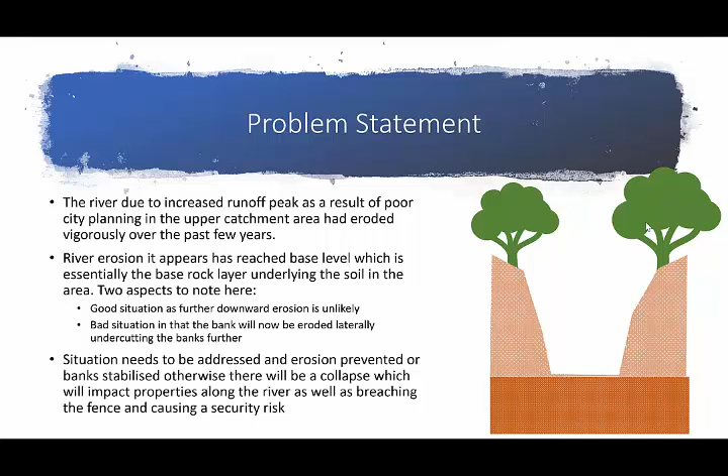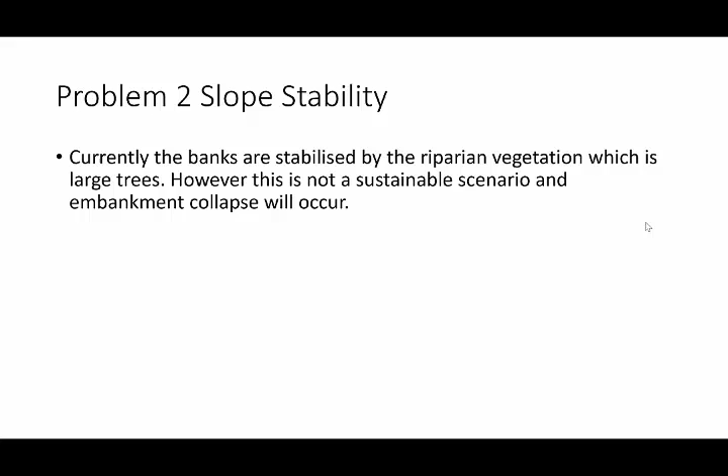If we have a look at the problem statement, the erosivity of the stream has increased due to developments upstream. Essentially what's happened is this has eroded away the channel, and finally we've hit the rocky base and it's started to erode laterally. This is now starting to undermine the banks. This is leading to problems of slope stability. Currently the riparian vegetation is maintaining the banks, but this is not a sustainable scenario.

If we have a look at this, here we have a steep embankment. You can see the stabilizing vegetation, mainly trees. And then we have a lateral erosion, which is undermining the banks. And finally, we have a rocky base layer, which I mentioned earlier. We're not going to be eroding below that.

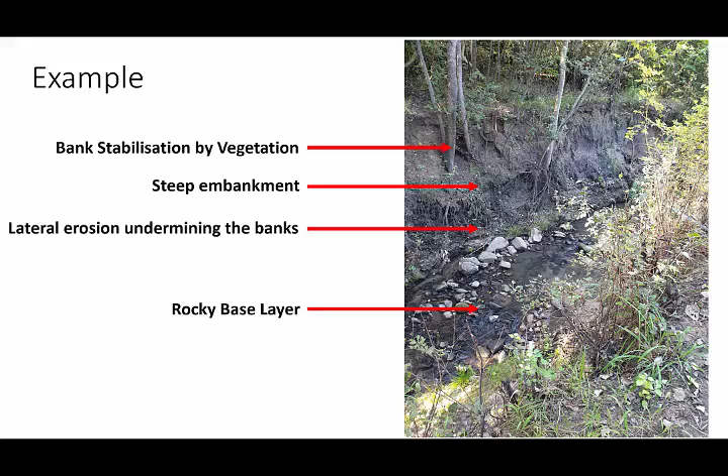We're very close to the fence in some areas. This is looking downstream. You can see that the path hardly exists any longer in some of the areas, and it's very close to the fence. Similarly, looking upstream.

Slopes are maintained at a gradient of roughly 2 to 1. And if you go beyond that and are steeper than that, generally they fail. So we anticipate in most of the cases along the embankment that we'll have some slope failure at some stage unless we stabilize them.

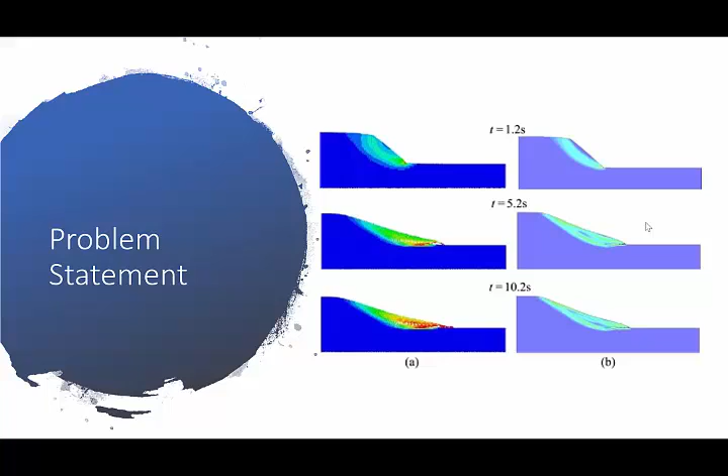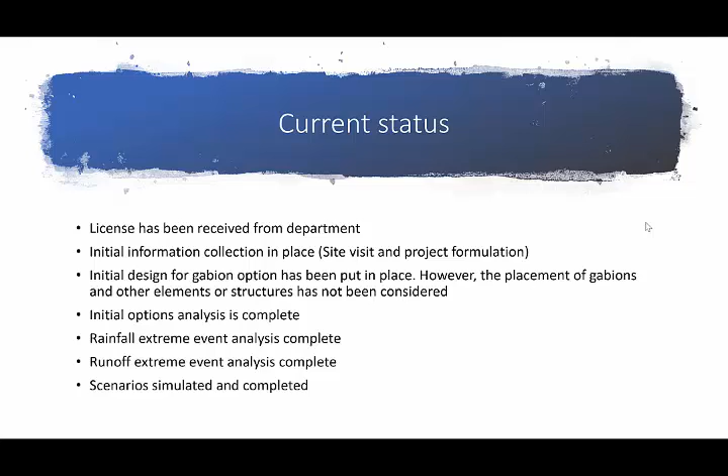If we have a look at the current project status, licenses have been received. We've done some initial information collection. We've done initial designs of the gabions, but we're going to look at different options related to that. We've done initial options analysis and decided what we're going to do. We've done a rainfall extreme event analysis, a runoff extreme event analysis, and we're looking at scenarios simulated and completed.

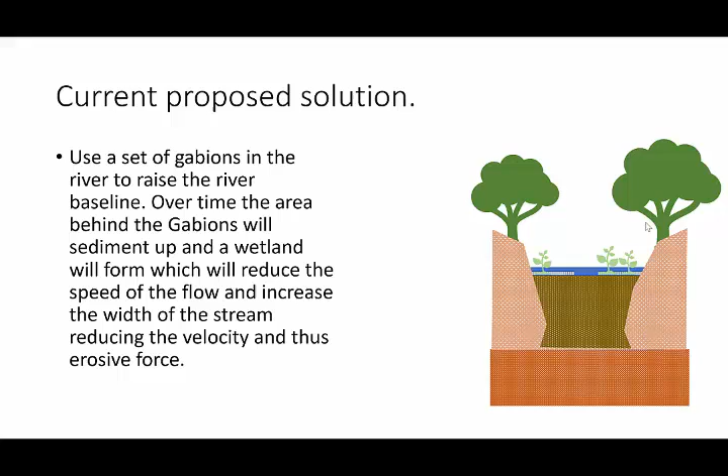The various options that we have a look at for rehabilitation: the first is putting a gabion structure across the stream. What this does is essentially dams it up and raises the base level of the river. Slowly over time, this should sediment up, and then eventually you get a wetland sort of forming above that. There are problems with gabions, which I will go into a little bit later.

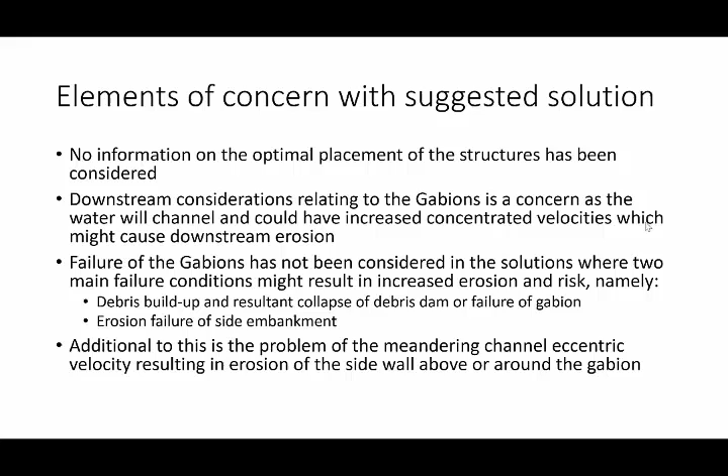Debris buildup can collapse this, and if you get a debris failure, it can be much worse than actually not having put the structure there in the first place. Then finally, the sidewalls can be eroded away, and this can cause major concerns. And we do have eccentric velocities down the river stream due to a meander at the top of the river.

The second option is embankment protection. Essentially what you do is you terrace the banks with various structures and put some stabilizing vegetation onto that. The preference of this particular solution is that there's no obstructions in the actual river itself that can be sort of forced away and changing the natural flow patterns. And generally these don't erode so easily because they're parallel to the stream flow.

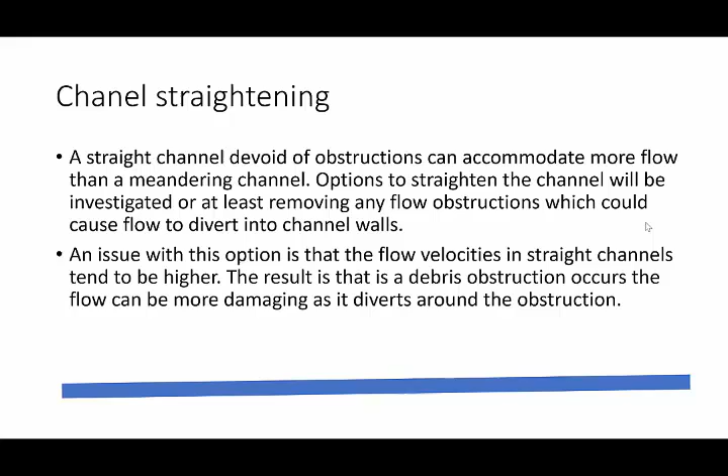Channel straightening is another option. Essentially, you take a meandering channel and you straighten it out. The water then is able to rush down relatively unimpeded. The problem is that quite often these channels get slightly clogged and you get erosion happening anyway. Added to this, it's quite an expensive construction project to get the equipment in to do this.

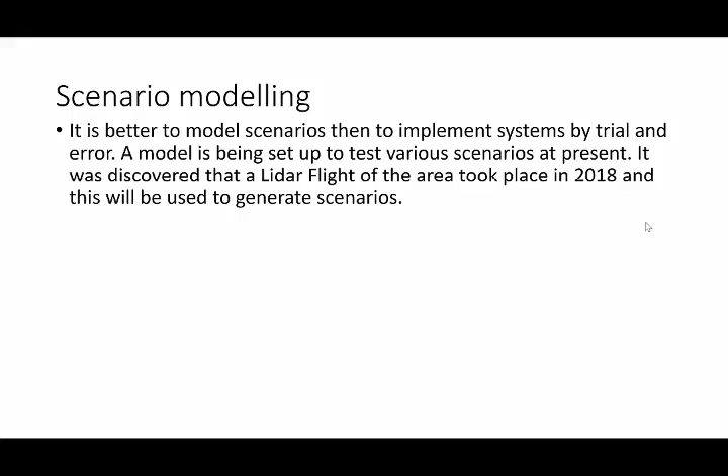So we did some scenario modeling with some LiDAR information. LiDAR is a very accurate surveying method which uses laser detection on the base of an aeroplane. We wanted to test various scenarios. So what was the impact of the meandering with the gabions? What is the best design structure with the gabions? Should we construct just several smaller gabions or two large ones, something like that? Which areas are currently a major risk? And what are the consequences of failure of the structure?

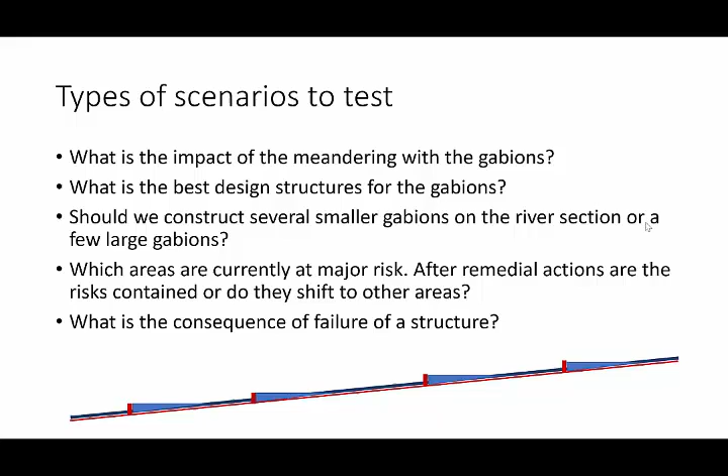So if we had a look at the scenarios, the first thing that we did is some hydrology. The catchment area is around about 5.9 kilometers squared. We used a method called the SCS method to determine the return period. We're getting a peak flow of 57 meters cubed per second at the time of concentration of roughly 37 minutes after the heavy rainfall begins.

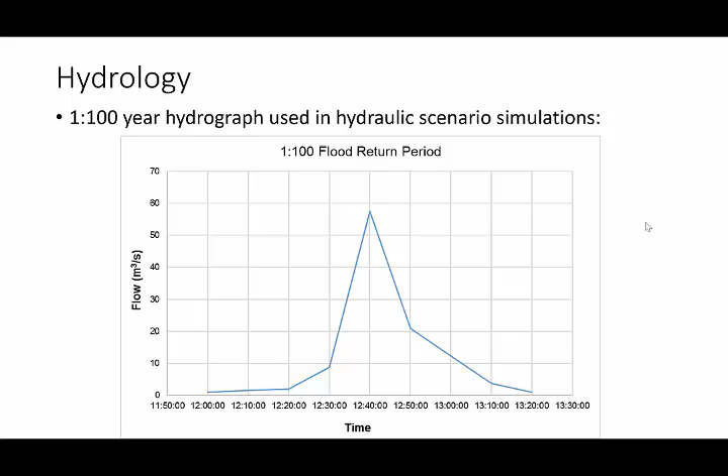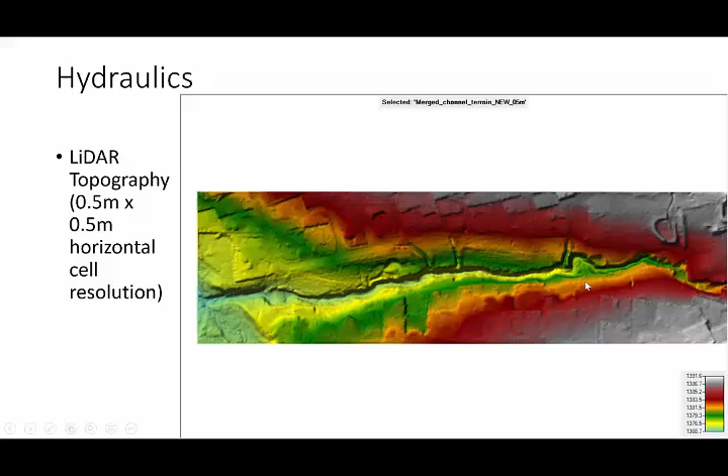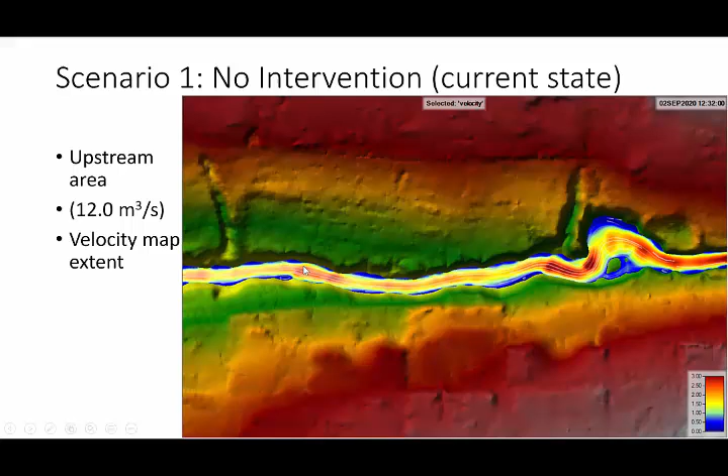You can see the meander over here at the top. That's where that old weir structure was. Here we have no intervention, sort of current state of water flowing down. The redder it is, the higher the velocity. You can see that there are some high velocities in this area striking this gabion structure, but you'll also see that as it meanders down a bit, there's certain erosion happening in various areas.

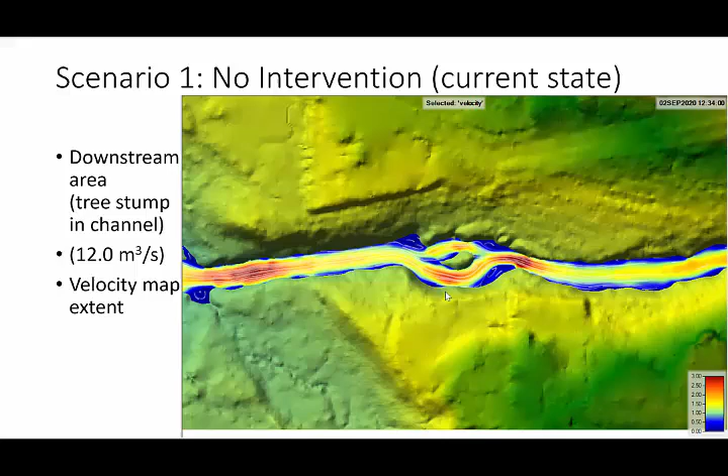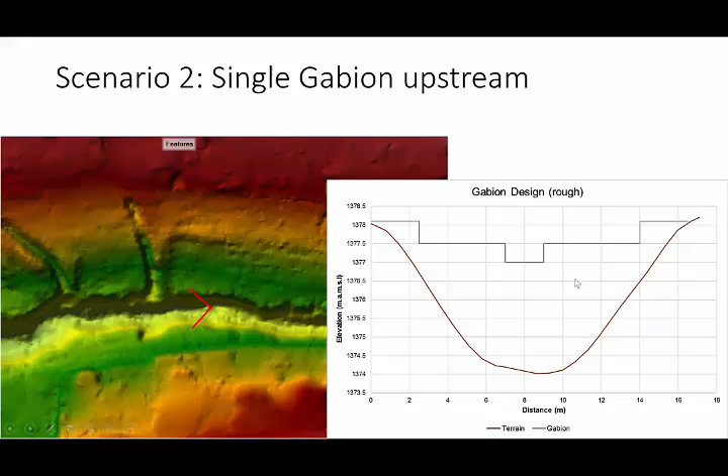What you see over here is the situation where we've put the gabion in an upstream position. It slows the water down with the damming effect, which you would anticipate, but what you can see is as it's going over the gabion, you get a lot more energy with that water, which can cause some serious erosion in some of these other areas downstream.

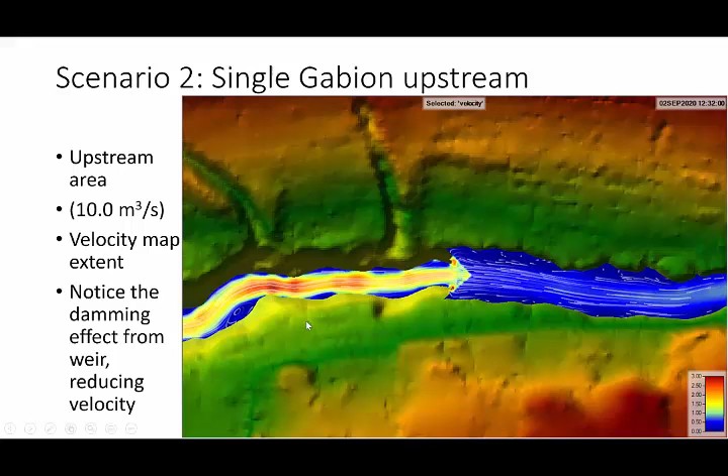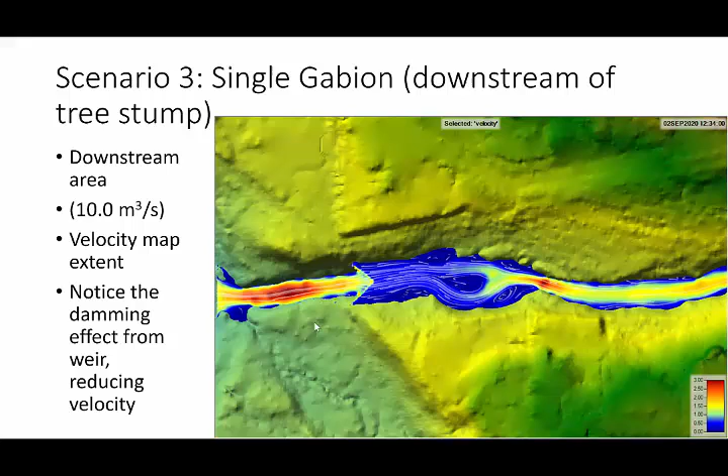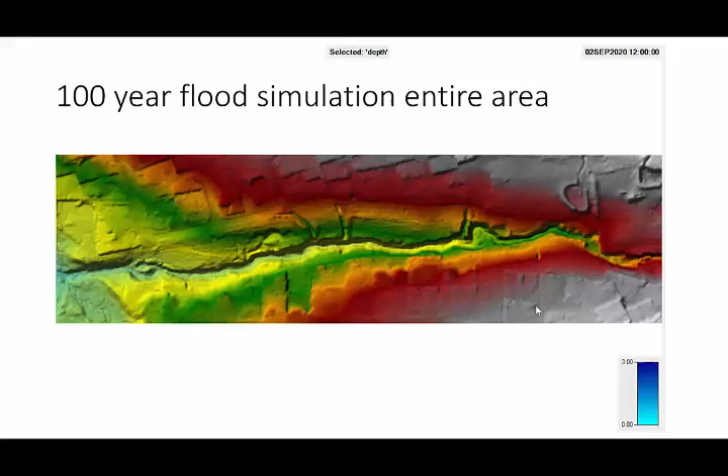Here's a 100-year flood simulation of the area. So we've got the flood coming down, got some water, and then it's filling up, and you can see it fills up quite substantially and starts to slightly overtop the banks. There's no threat from the 100-year flood line at the moment. Most of the properties are well designed and out of harm's way.

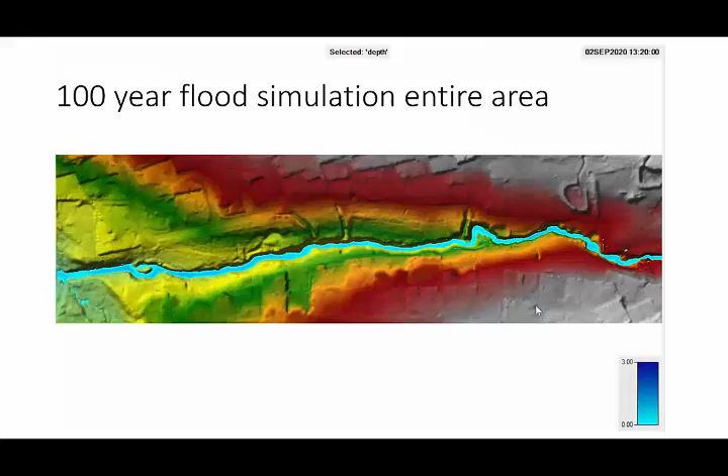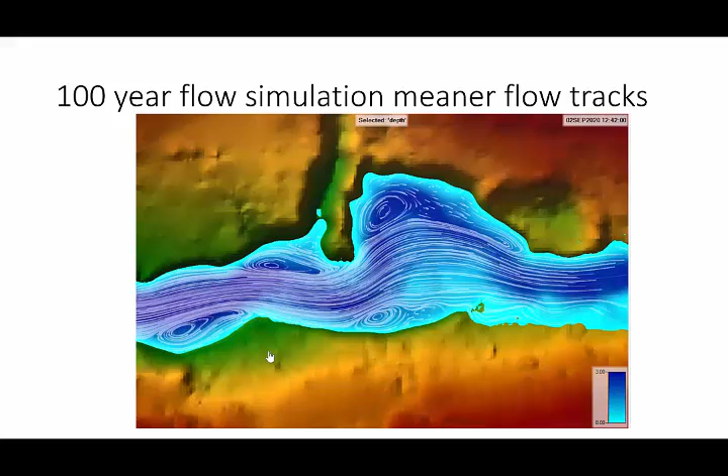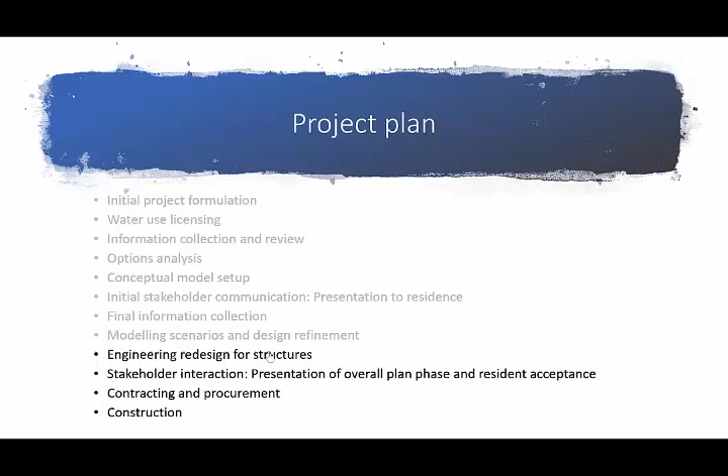In terms of recommendations, initially what we wanted to do was have a look at a multifaceted approach to the project rehabilitation. So we're going to redesign the gabions. We're going to have a look at various channeling to reduce the meandering, look at protection measures to stabilize the embankments, and then we're looking at straightening the river courses in some places if possible.

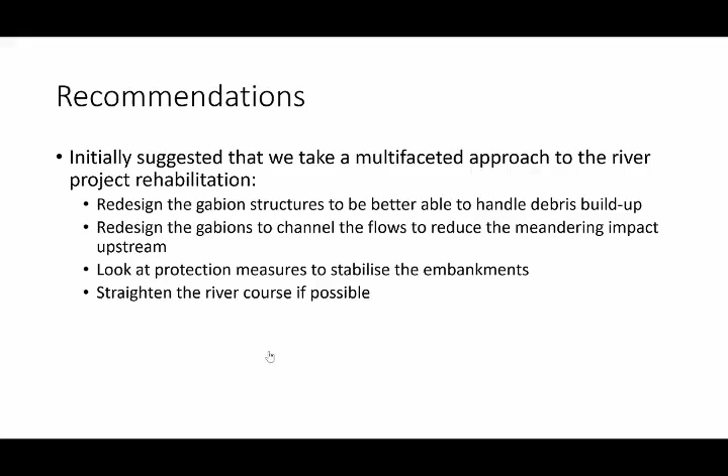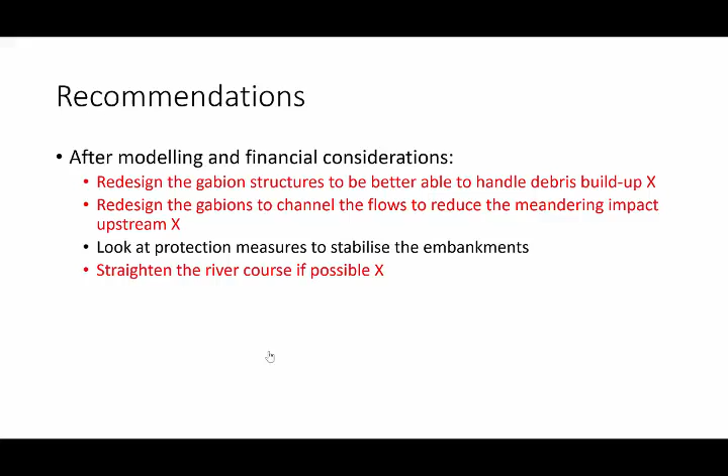On review of the simulations, it's been decided that these options are actually not great. So it looks like the protection measures that we're going to take is stabilizing the embankments and making sure they don't fail. To this end, the way forward, we're going to stabilize embankments. The first thing is we need to remove some of the larger trees where the treetop biomass can cause failure by pulling out various chunks of earth from the embankments if they fall over. And that's something we want to avoid.

So various trees have been selected and identified. People will be contacted on the boundary who are influenced by the tree removal. The trees will be felled. The area will be revegetated with indigenous trees after that.

Then we're going to set up bank reinforcements, particularly on the lower sections of those banks to stop the erosion from occurring next to the river, and then they'll either be gabions or other structures. It will depend on the engineering design. These will be running parallel to the river, and they'll probably be bolted into the rock areas where necessary.